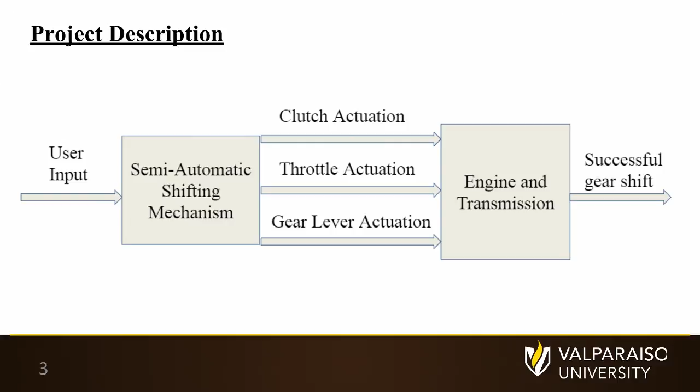As we've all seen this multiple times before in all of our presentations, for our device, a user inputs a signal through 2 buttons. That brings the signals to the semi-automatic shifting mechanism, and the mechanism consists of 3 parts: the clutch actuation, throttle actuation, and the gear lever actuation. These 3 parts interact with the engine and allow us to make a successful fast gear shift.

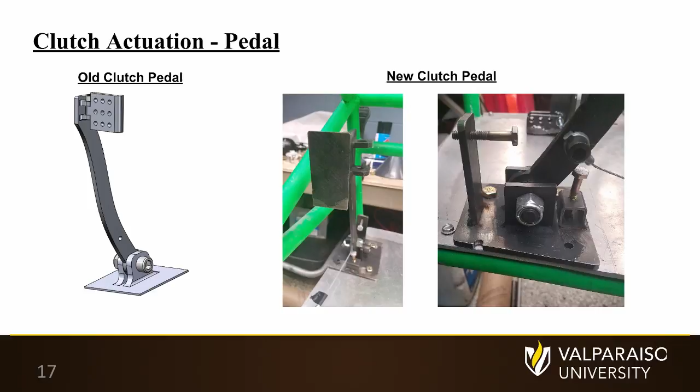Starting out with the clutch actuation, more specifically the pedal, you can see our old first design over on the left-hand side. We decided to change that for a few reasons. One, we found out that the spring out pedal was no longer needed since we have enough foot room already on the car. So we swapped it out for the center picture here, which is just a small rectangular plate still mounted on there, which suffices for enough area to push the pedal.

Also, you can see in this right picture that we added 2 stops to the pedal so the pedal doesn't go too far forward or too far backwards. This allows us to adjust the clutch in a way that whenever we're pushing, we are always moving the clutch cable.

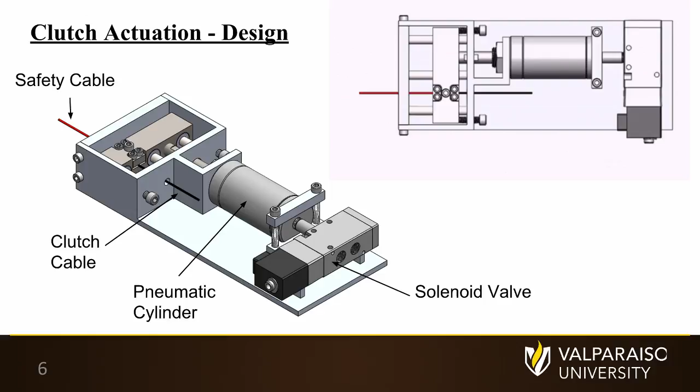So you can see from the animation up here, when air is sent to the cylinder, it pushes the piston here, which moves this piece outward, causing the clutch to be disengaged. When the air pressure is released to the atmosphere, the spring in the cylinder, as well as the spring in the clutch, allows it to return. So the fabrication of this actuator went fairly well. There weren't too many issues.

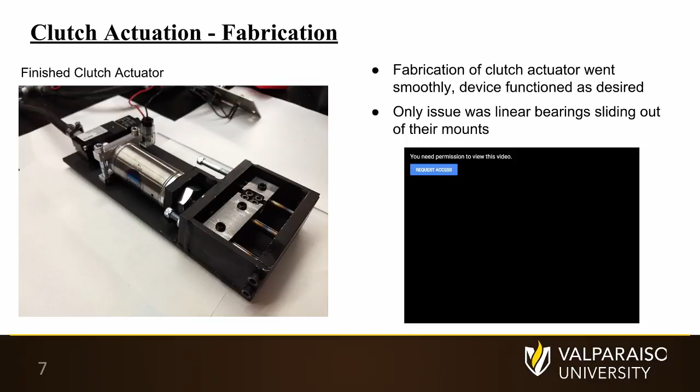The only issue that we had was that during operation, some of the linear bearings in here would come out of their mounts, but they didn't have enough room to actually fall out. So the one change that we would have to make is just use some high strength epoxy to keep those in, rather than just using these set screws as you can see on top of this piece here.

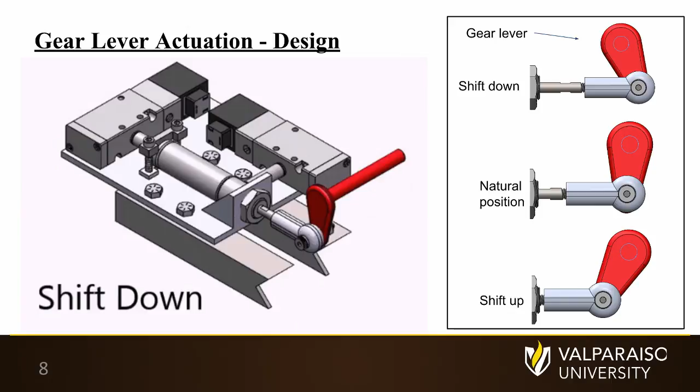For the gear lever actuator, we use a double acting cylinder, meaning that the air pressure can push it either forward or backwards. You can see on this graphic on the right of the screen, when no air pressure is sent to the cylinder, the gear lever, which is shown in red, causes it to rest in a natural position. When the rear solenoid valve opens, air pressure comes into the rear of the cylinder, pushing the piston forward, causing the transmission to shift down, as shown above here. When the forward solenoid valve opens, air pressure pushes on the front of the piston, pushing it back, causing the transmission to shift up.

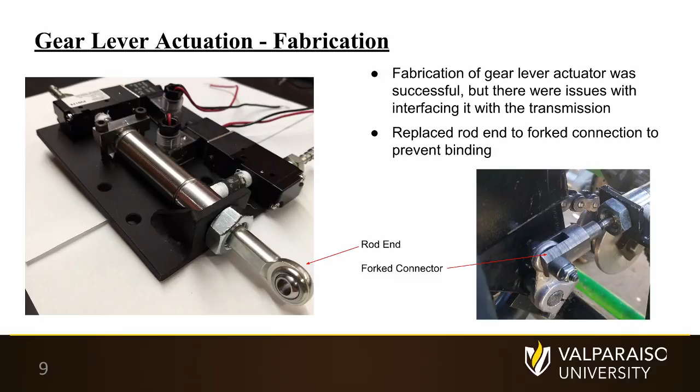The fabrication of the actuator went fairly well. There weren't any issues with it, but we did encounter some problems interfacing it with the transmission. So as you can see on the picture on the left of the screen, the original design, we had a rod end style connection, which would be offset to the gear lever, which is shown right here. We changed that up to a forked connection so that the piston in the cylinder would be in plane with the gear lever rather than offset to it to prevent any binding that would occur. We had some issues with it just not working smoothly, so having those in plane, there was no moment of the things trying to fight each other, and it worked a lot more smoothly.

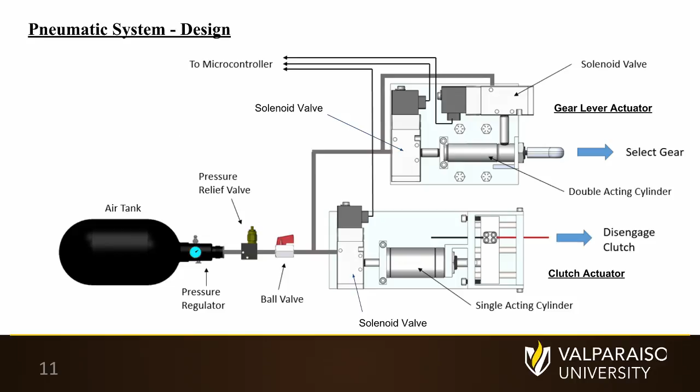So here's an overview of our entire pneumatic system. Starting over here on the left, we have our air tank, which, like we said before, holds air at about 3,000 psi. That then goes to a pressure regulator, which steps the pressure down to 100 psi, which is what our system needs in order to operate correctly. We then have a pressure relief valve, so that in case the pressure regulator fails, it doesn't send 3,000 pounds of pressure to the rest of the system, which would break everything.

We then have a ball valve, so if we need to do maintenance, take stuff apart, things like that, we can shut off the supply of air and not have to take everything else apart in order to take other components and do maintenance and whatever needs to be done. You can then see the air line splits off and goes to the clutch actuator here on the bottom, and then the gear lever actuator on the top.

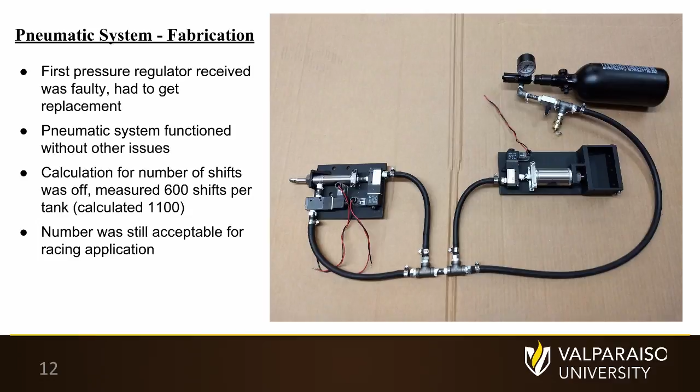So in fabricating our system, most things went pretty smoothly. Initially, we had a little hiccup where the pressure regulator that we received turned out to be faulty. So that set us back just a little bit, but once we got a replacement, building the rest of the pneumatic system went very well. We didn't have any issues with mounting or airline fittings. Basically, all that stuff went very smoothly, other than the gear lever actuator, which you heard before, which was just a misalignment issue.

The other problem that we had was what we had calculated for how many shifts we would get per one supply of the air. We had calculated we would get about 1,100 shifts. However, in our testing, we found that this was closer to 600 shifts. And this is due to some leaks in the system where air could escape. Also, the pneumatic cylinders probably used more air per cycle than we had calculated. So that's why that number dropped so significantly.

However, even with the drop in amount of shifts per tank, we still have plenty of shifts for the racing application that this vehicle will be used for. So in the end, it didn't end up being a problem.

The next system is the throttle actuation. So we have an electronic servo which activates the throttle. And this is so we can perform rev match downshifting. In order to get this to fit correctly, it took several iterations of building a bracket, mainly in order to get the pulley on the servo aligned in plane with the throttle, and also avoid other parts of the engine so that it wouldn't interfere with things like the valve cover or the fuel system and could operate smoothly.

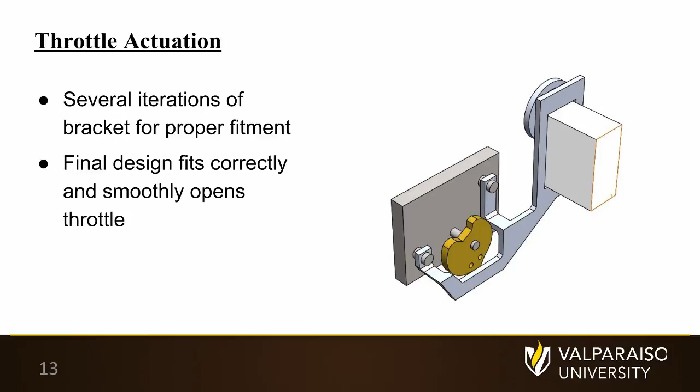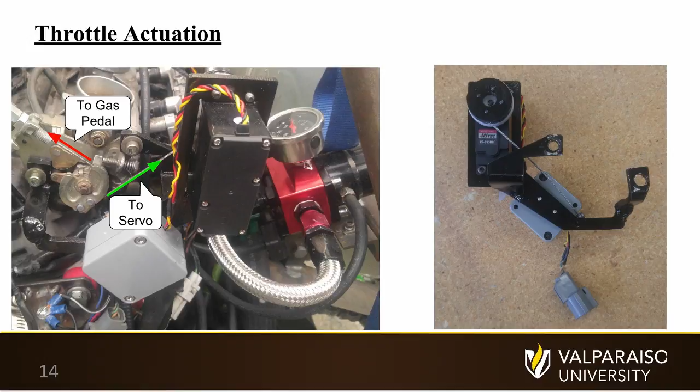And then on the right here is just kind of an overview picture of the servo itself in the bracket, and then the little gray box is a voltage regulator, which we had to add into the system since the car runs on 12 volts and the servo needed 6 volts, so we had to step down the voltage in order for it to work correctly.

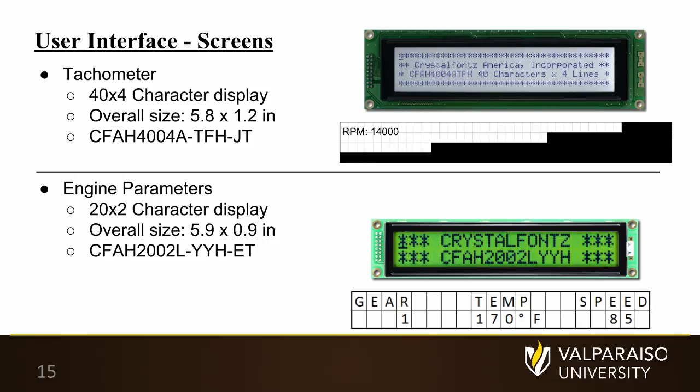So our user interface has two LCD screens, 4x40 on the top, and it has this visual tachometer and the RPM in the top left corner. And then our second LCD screen, which is on the bottom of our user interface, has gear number, temp, and speed all listed, and that is a 2x20 LCD screen.

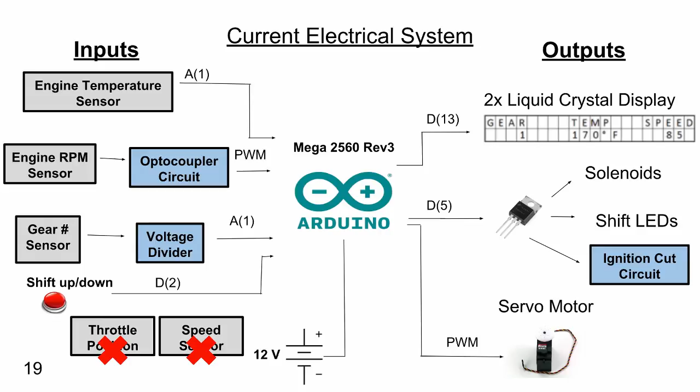So currently, we made some modifications this semester. So we ended up not needing the throttle position sensor. And then for vehicle speed, instead of reading in the PWM signal, we just calculated ground speed. We ended up calculating that from the gear ratio of the transmission. And then we conditioned some of these signals before we read them into the Mega so that the Mega can process them properly. And then we added in an extra digital output for the shift light and to cut the ignition.

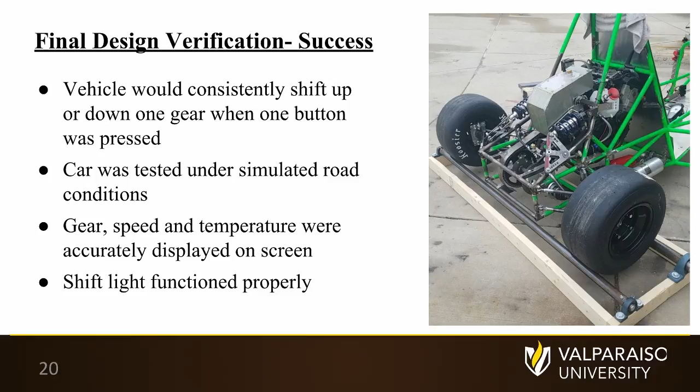Okay, so for some of the final design verifications, I'm going to be going over some of the successes that we had. The first one was that the vehicle would consistently upshift upon the press of a button and downshift upon the press of a button. Going further, it would only execute one upshift upon the press of the button once. Even if the button was held, it was needed to release from the button and then press it again. And additionally, we added in a half-second delay to make sure that the driver wouldn't accidentally double tap the shift button and change 2 gears really quickly.

The car was tested under a simulated road load. So basically what we did is we created a system of rollers that have a higher rolling moment of inertia, and that gives us a little bit more road-like conditions. The heavier steel tubes that are underneath the tires can kind of help keep the tires rolling when they start rolling, but also resist the initiation of rolling upon starting the car, which is good for engaging and disengaging the clutch to be the most road-like.

Additionally, the gear, speed, and temperature were accurately displayed on the screen. I'm going to be talking a little bit more about some of the challenges we had with this in a minute, but once the car was started up, it would display these properly.

And then finally, the shift light functioned properly. So basically the shift light was to inform the driver of the optimum time to shift in order to stay within peak power of the engine. This light is able to be changed at which RPM it actually comes on at, but we usually keep it about 500 RPM below the max RPM of the engine.

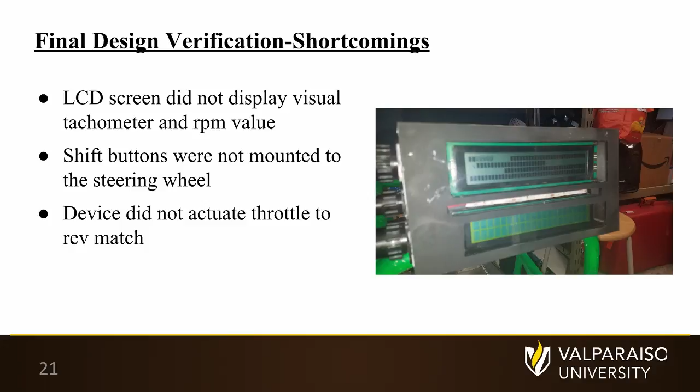So some of the shortcomings that we had with our project: the LCD screens didn't display the visual tachometer appropriately. When we used a tachometer function in the code, it worked well. However, reading in the tachometer reading, the engine RPM from the car, we were having some problems. Before executing a shift, it would work properly.

However, once a button was pressed to execute a shift the first time, it would have a lot of distortions. You can see the second line is shifted over, and then some of the characters would become messed up. And then for each consecutive time the button was pressed, we'd get a little bit more distortion.

And then the shift buttons were also not mounted to the steering wheel. That was another something that fell through the cracks that we just kind of weren't anticipating, kind of forgot about from our SDRD that it was something we were supposed to do. But luckily our system was still able to function appropriately.

And then one of the bigger challenges that we came into was that the rev match downshifting didn't work quite properly. Like the RPM display, we were able to control the servo from the code. However, when we integrated all of the different portions of the code together, we had a hard time getting the servo to actuate upon the press of a downshift.

So that's just something that we're going to be looking into for the future and seeing if there's maybe another easy way we can go about doing that. And that's something I'll talk about later as well.

So for testing, we had 2 really major components that we needed to meet. The first was that the system needed to be able to execute 100 shifts without missing a shift. Luckily, we got this on the first try, and we kept going from there and still didn't miss a shift. So that worked out really well.

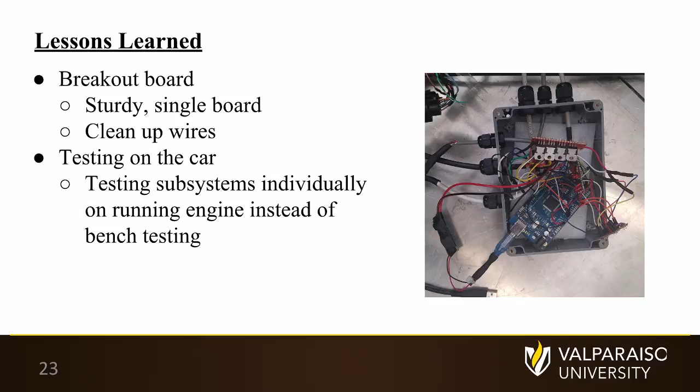And then not overcomplicating was a big one. I'm sure a lot of teams ran into things like this. Hunter mentioned before the clutch pedal. The spring-loaded clutch pedal was a great idea. However, it was just one more level of complexity that we didn't need. So removing that just gave us that much more room, that much less complexity in the front of the car.

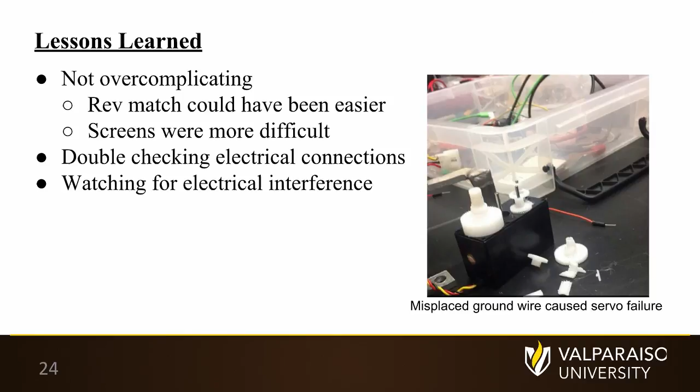And then the rev matching: upon discovering that our servo wasn't working appropriately, we determined that there might have been an easier way to rev match just from changing the engagement time of the clutch upon the downshift. And then double-checking electrical connections. You can see over here, just due to a misplaced ground wire, we exploded our first servo motor.

And that was just something that attention to detail and just double checking our work would have helped beforehand, but just double checking that. And then watching for electrical interference. We had some problems with our fuel pump when it was working, and then when the servo needed to draw power, we were having some interference. So looking into that beforehand might have helped us just implement some capacitors before we needed them.

So then for a summary, we went over our project description. We went over all of our subsystems that we worked on through the semester, our final design verification, and things that were met, and then some of the things that we struggled with. We went through the testing, and then the lessons learned. And I don't know if we're doing questions or not.

So you demonstrated last week that it's working fine, everything is working, but I have a question. If you want to redo your project, is there any subsystem you can approach in a completely different way? Like, completely redesign one of your subsystems for future generations? See the screen and the servo?

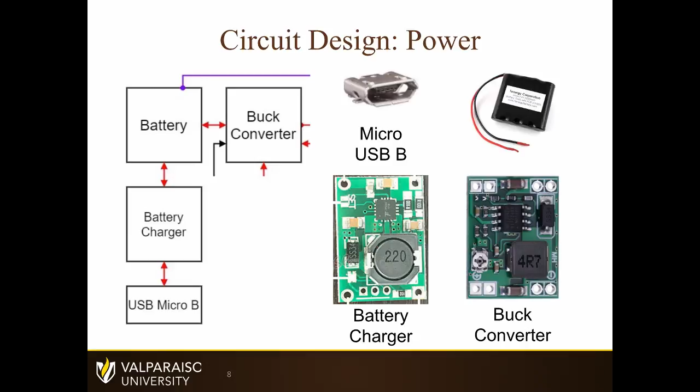In the original, we had a micro USB port, battery charger, and a buck converter. Micro USB was going to go through the battery charger, charge the battery, as well as power the circuit at the same time. However, there were some problems with this. First was this buck converter. The output was not always 5 volts. It had a tendency to change along with the battery voltage. And as a result, we lost 2 Raspberry Pis and 2 analog to digital converters.

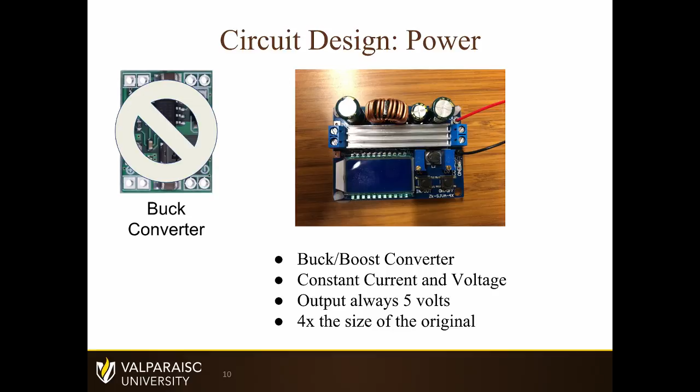So the solution was to get rid of it and get a buck boost converter. It is able to maintain a constant output voltage, which is always 5, which is ideal for the Raspberry Pi as well as the analog to digital converter. The only issue is it's about 4 times the size of the original converter. Also, the micro USB port was gone. We replaced it with a simpler power jack, mostly because it was challenging to fit the USB port into the housing. The power jack had enough depth that it was able to go through it.

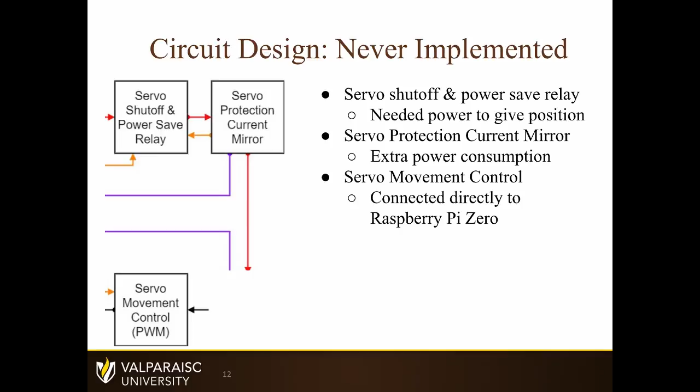And we also had some stuff that never ended up being implemented, such as this servo shutoff and power save relay. We had to wire an additional wire into the servo internal potentiometer to be able to achieve feedback, so knowing whether the door is locked or unlocked. And if it was powered down, we would never receive a signal over that. Also, the servo protection current mirror was never implemented either, as it just drew extra power. And then the servo movement control was an additional circuit to interface between the Raspberry Pi and the servo. And again, we ended up just connecting the servo directly to the Raspberry Pi.

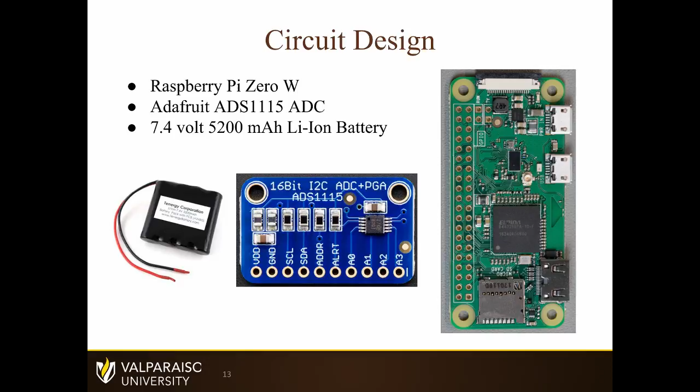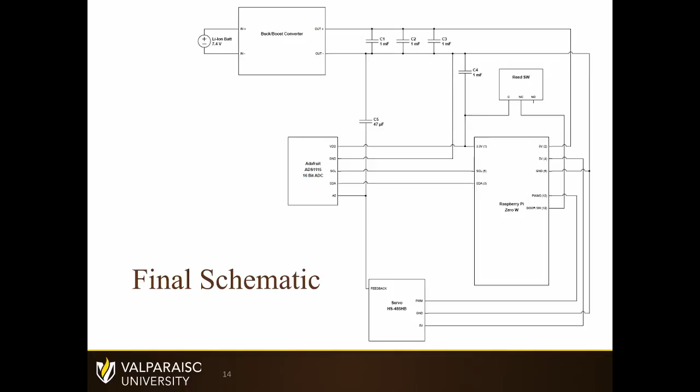The things that survived were the Raspberry Pi Zero W, which is the brain communicating with the database, as well as reading the ADC and the reed switch. The ADC read directly from the servo motor, and then a 7.4 volt battery. This is the final schematic that we ended up with. I understand it's kind of hard to read. There are some new components on here that I will show you.

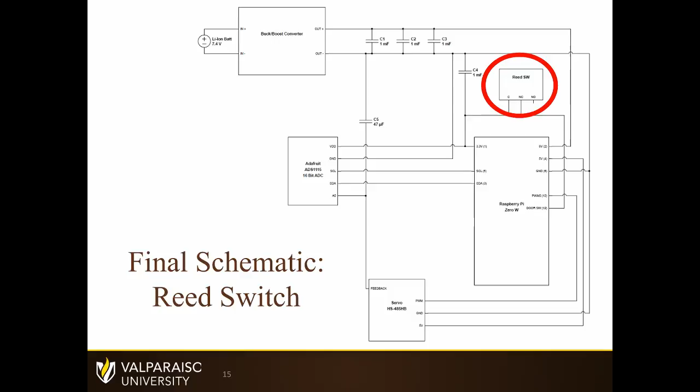The first was that reed switch. That component directly tells us whether the door is opened or closed, as well as not allowing the door to lock if it's changed to a locked state but the door is open. Also, the feature that kind of didn't work was warning the user of a break-in. That's also what that would have been used for.

Next are these 1 millifarad capacitors. When we first ran this on battery with the new buck boost converter, every time the servo tried to operate, it would actually cause the Raspberry Pi to restart. And after doing some investigation, we realized that it was overcurrenting the buck boost converter. So I started adding capacitors one by one until, when I operated the servo, the Raspberry Pi didn't restart.

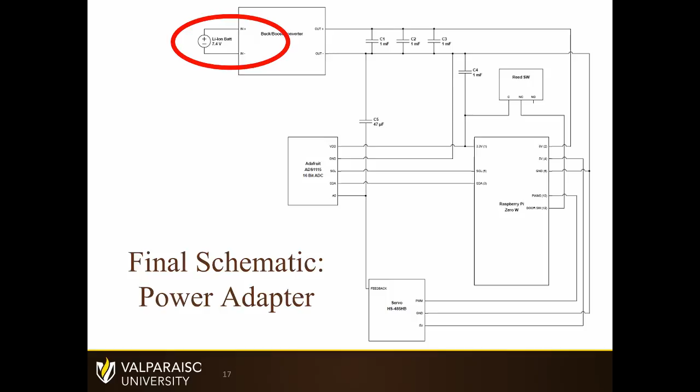And finally, the power adapter that was on the side plugged directly into the front of the buck boost converter, the input side. Our battery life from the original, which had about 92% efficiency, was probably about 10,617 unlock cycles. As you can probably guess, it never ended up being that.

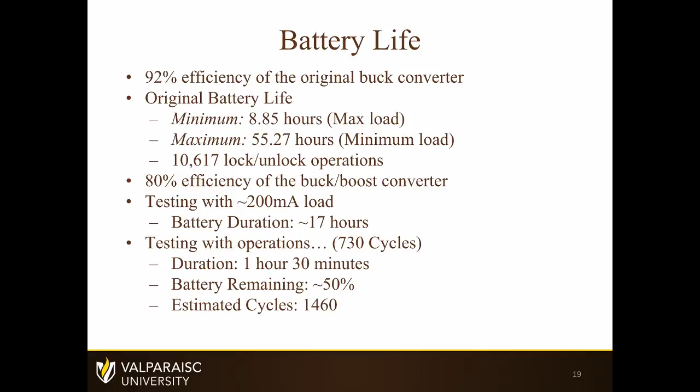The new buck boost converter had an efficiency of about 80%. I tested at about a 200 milliamp load, and the battery ran for 17 hours. That's with no operations of the lock. And then when we tested with operations for about an hour and a half, 730 cycles, about 50% of the battery was remaining. So the new estimated cycles would be about 1,460.

The mobile and web application can unlock and lock the deadbolt. It shows the position and indicates if the door is open or closed. The main problem with it is that the login screen was never implemented, so there's absolutely no security on your smart lock.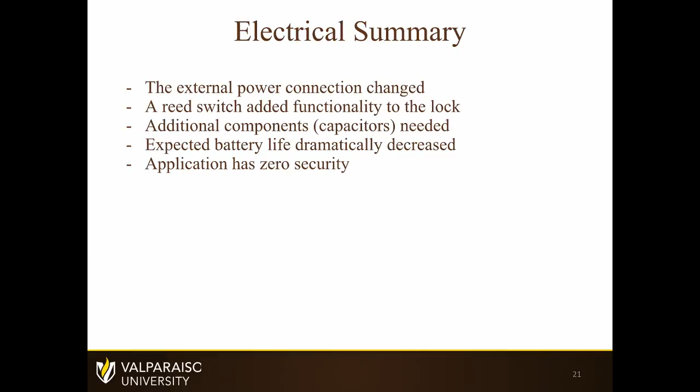So in summary, the external power connections were changed. The reed switch added functionality, letting you know if the door was open or closed. Additional components were needed. Expected battery life dramatically decreased, and the application has zero security. I'm going to pass it off.

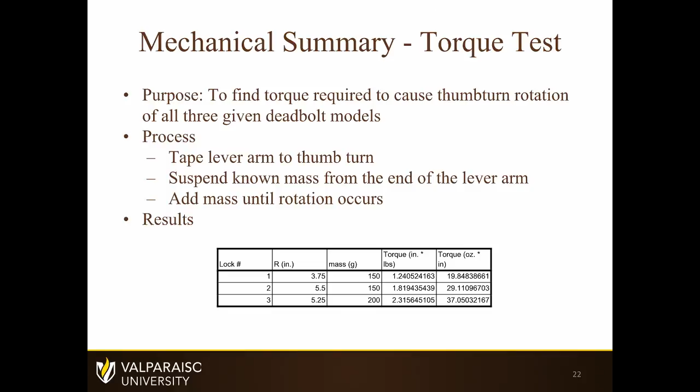So, preliminary for our mechanical systems, we wanted to determine how much torque was going to be necessary to turn the deadbolts, so we could order the right servo or have the right drivetrain for it. Basically what we did was we added a lever arm to the thumb turn, and then we progressively added more mass until it was able to actually turn the thumb turn.

And one of our deadbolts was particularly hard to turn, and the maximum for that one was 37 ounce-inches. So we knew that we could not have a servo that was going to be any less powerful than that. So what we ended up selecting was this HS-485HB servo. And what was nice about that was that it had 66 ounce-inches of torque at 4.8 volts. So that was going to be 1.8 times what we needed at most.

So it was going to be possible to operate at 5 volts, which was nice for the rest of our system. It was compact. It was only about 1.6 ounces, which is not very significant. And the potentiometer feedback was really important because then we knew if it was going to be locked or unlocked.

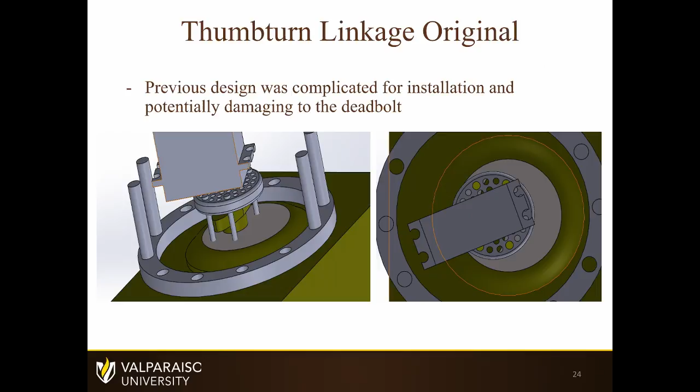So originally, to actually connect to our thumb turn, which is seen here, it was going to be a plate with a bunch of holes that were threaded so you could add pegs to each specific deadbolt. And so we thought that that would be really modular, but unfortunately that was not going to be very easy to install, because we wanted a system that was going to be very simple for the user to install, even if they're not mechanically inclined.

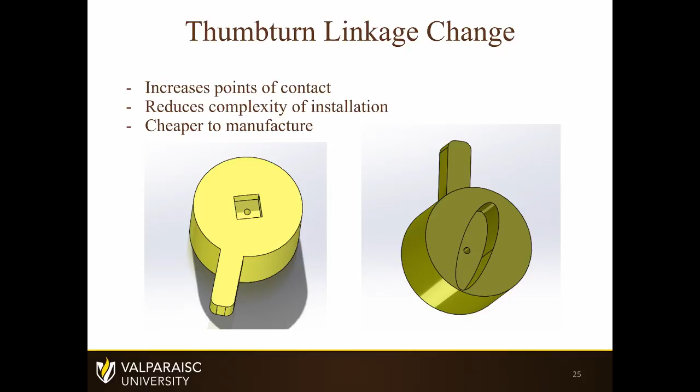So what we decided to do was have 3D printed linkages that would fit each specific deadbolt that was required by a customer. And originally we were going to have a small little peg to put in here so it wouldn't just be the spline from the servo, and it would increase the surface area on the 3D printed parts since it's a little more fragile. But instead of doing that, we decided to just use the actual servo horn that came with it.

And we did that because then we did not have to manufacture a spline into a square block of aluminum. And it was one way we knew that we weren't going to damage the spline by having a material that was going to be a little bit harder than the actual drive shaft of our servo that we purchased. And it was also going to be cheaper for us since it's free for us to 3D print these components.

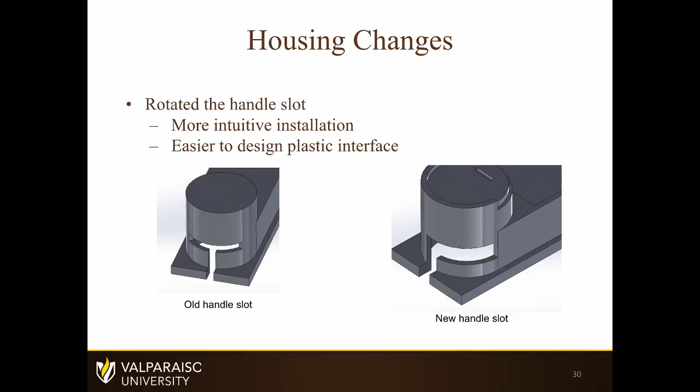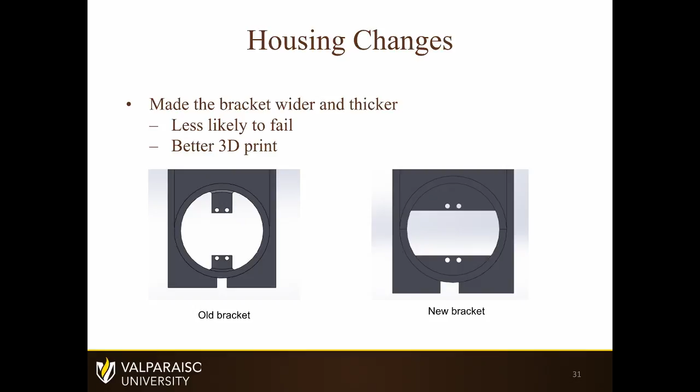And then here, this is where our servo actually connects to our housing. And instead of just having them be tabs, we just extended it longer so that we'd be able to have a little bit more security of a housing and not have to worry about these tabs breaking off under torque.

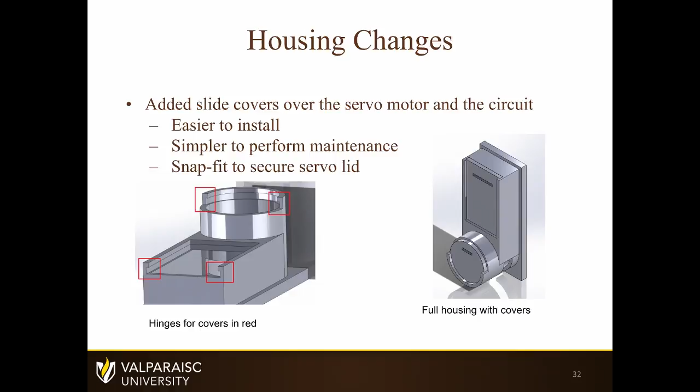And then we also added these covers to be more aesthetically pleasing for our electrical components and our servos, so they wouldn't be exposed and there wouldn't be anything that would be able to jam it. And we also added a snap fit to that after about our third revision so that we wouldn't have any jostling when the doors open or close.

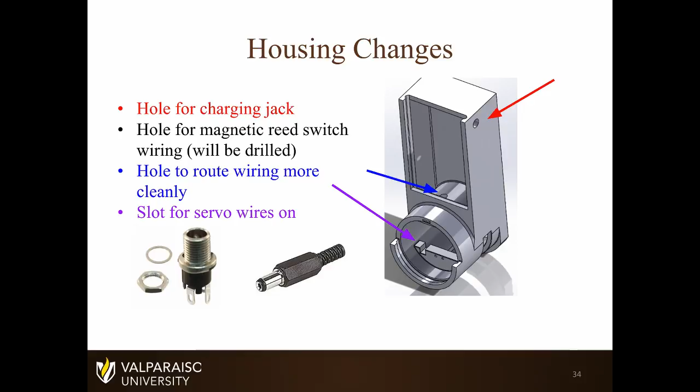And also for our third revision, we added our power jack because we had a little bit of change in plans for our power supply. We added a hole to route the wiring for the potentiometer and the servo. This was actually just for the installation of the servo. We didn't realize, because before we had to do some post operations on our housing in order to fit the servo through.

And then there's also a hole which is not visible right now for the magnetic reed switch, just the wires that go out to that. And this is basically just how the servo goes in. There's just 4 screws that go into the tab there. And then the linkage goes on top of the servo.

And finally, one of our final changes that we made to our mechanical systems was our change from our adhesive, which Mike will tell you a little bit about later. Originally, we used double-sided command strips, but we found that the tabs weren't accessible. Ordinarily how you take these off is that you pull the tab straight down and it stretches the adhesive out so it's no longer stuck to what it was originally stuck to.

But we could not get our housing off without prying it off, which you guys saw, that little dent that was in the doors because we used a screwdriver to take our housing off. So we switched to Velcro strips. So that means that we can take the housing off the wall and then the tabs would be visible, so it would be removable without any damage to the door whatsoever.

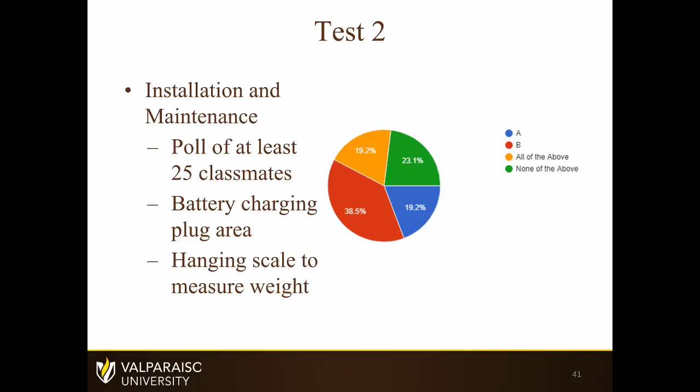So test 2, like Bill was saying with the adhesive, we had to change out our adhesive because before we were using just the regular stick-on 3M command strips, and that had a little bit of problem when we were trying to get those off the door. We've since moved over to the Velcro adhesive, and that is working out a lot better. Even during shooting of our video, we were still able to use a lot of the Velcro adhesive strips, and it has been working out great for us.

So with the second test, it was to poll the class. We revised the poll that you guys took, and we gave it to the later section. So this was what they received as well. They did, however, get the correct answer, but upon further investigation, asking them what they really would have preferred, if they had the option to choose that both looked the same, they would have chosen that. I had talked with almost all the people in the other section, and they just guessed, and it just happened to be a lot of them guessed the correct answer.

So another aspect of our test 2 was that there is a battery charging area. Bill showed you that we did adapt that there to be a plug for accessibility to the battery. So that passed, and then one of our SDRD requirements was that the system in its entirety was to weigh less than 3 pounds, and it came out to 1.75 pounds.

So test 3 was so that it did not make a lot of noise. Mainly the requirement was so that it did not wake up Professor Johnson's kids if he was actuating it at night. So we adapted the test to make sure that it was under 50 decibels from 20 feet away, which it was 9 decibels underneath it, so it definitely passed.

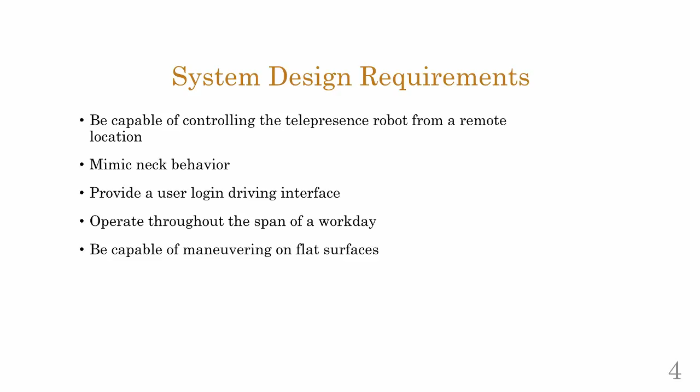So the goal of our telepresence robot was to give any user the ability to access our robot at a remote location and be able to drive it anywhere inside of Gellersen. Some of the system design requirements we came up with to meet this goal: we wanted to have control of the telepresence robot from a remote location, obviously. We wanted our camera gimbal to mimic neck behavior to give a more natural feel.

We wanted to provide a user with a login, driving interface. We wanted the battery to operate throughout the span of the workday, and for the entire robot to operate throughout the span of the workday. And we wanted the robot to be capable of maneuvering on all flat surfaces.

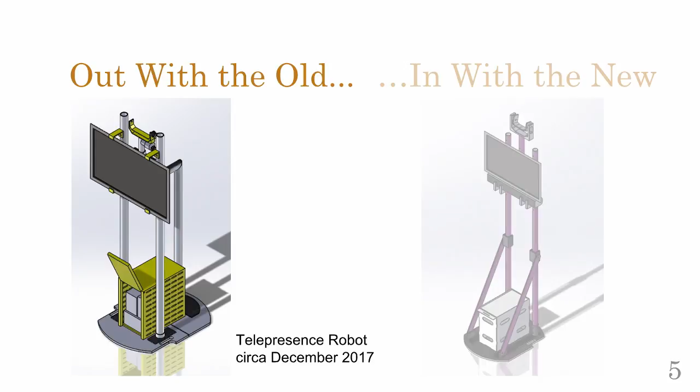So in December, this is the design that we came up with. And then at the end of our semester here, we approached this final design. And now Landon will go ahead and tell you more about what we did.

So, starting with kind of the meat and potatoes of our design: the stem structure, what is holding up our monitor and our soundbar. So in what we came up with at the end of last semester's design, as you can see, we have the 2 side stems with one middle stem to the back. As you can see, the monitor is only being held by these brackets here, and the side stems aren't actually connected to the center stem.

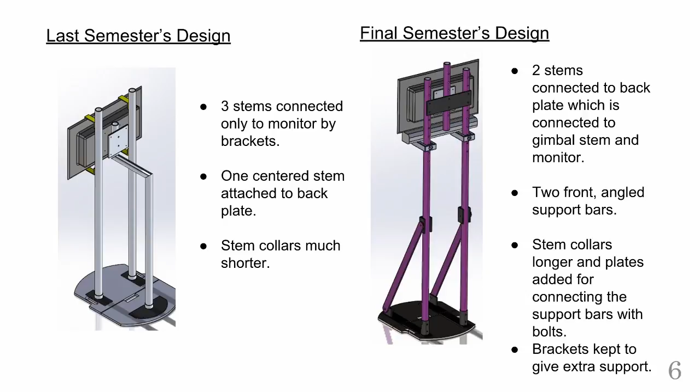So we decided to change not only this back stem design and make it into 2 front support stems, but we also, for our final design and what you can see on the robot now, have this back plate that also connects the side stems to the center monitor and the center stem.

We also got rid of the 2 top brackets. We realized they weren't important now that we had the horizontal bar giving extra side-to-side support, but we did keep the lower brackets to help reduce some of the wobbling motion from side to side when it turns and stuff, and to give it kind of a fail-safe.

So here's some of the intermediate changes. You guys have seen some of these before. So originally when we first went to this 2 angled front support design, we were just going to have this all welded. So in here, this was all going to be aluminum. And then we realized, well, none of us have ever welded aluminum before, and we figured this would not be the time to learn.

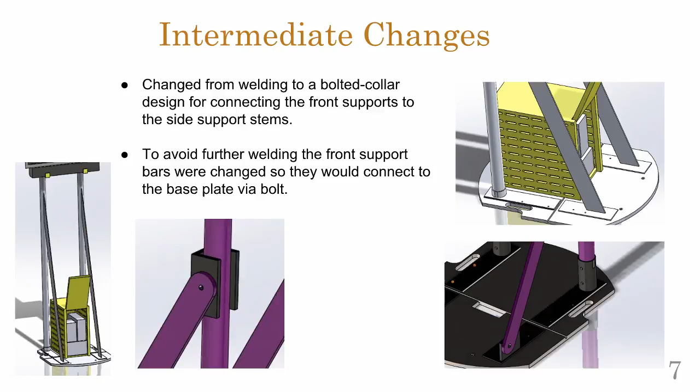And we figured that welding is going to make things pretty permanent. So we decided to come up with a design that's more manageable when it comes to taking apart and making changes. So at the bottom, we changed all the bottom plates to steel, the collars over here to steel as well, and made them longer so they can be bolted through. They're welded here, as you can see on the robot today.

We also created a front plate that is welded to this base plate, and all of this is bolted through. And then up here on the stems, instead of having it welded, we have this collar design. All of this was manufactured fairly well according to the pictures and the design.

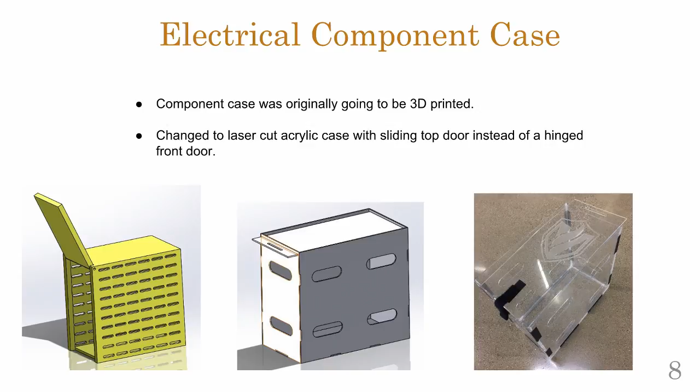So the next mechanical thing, one of the last things we tackled, was the electrical component case. This is the case that holds the battery, the PC, the converter, inverter, all the stuff we have. Originally we were going to 3D print it, but then we realized that we cannot physically 3D print it, I believe, with the size of it and what we're given in terms of 3D printers. So we decided to make this acrylic, laser cut, and then glue it together with adhesive.

And we also changed the front hinge door to a top sliding door, so it's more accessible from the top and easier to work on the components inside. And here's the finished product. And yep, I'll hand it over to Echo now.

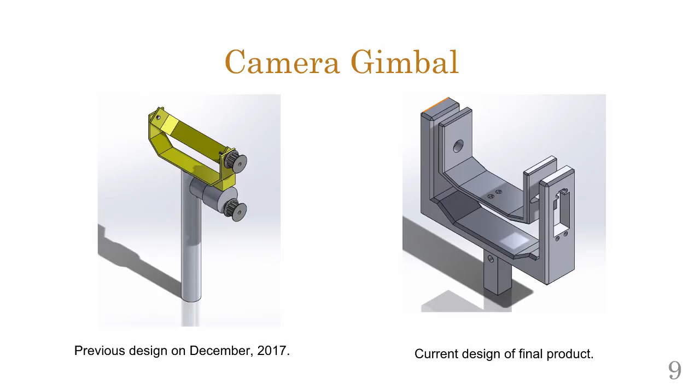So we also did some changes to the camera gimbal. So on the left is our old design of the camera. As you can see, the motor is directly mounted on the support tube here, and it will drive the gimbal by the gears and belt. On the right side is our current design. So the motor is mounted on the outside of the gimbal in this square here and connects directly to the inside by this cross shape. Later I will show a clear picture of it.

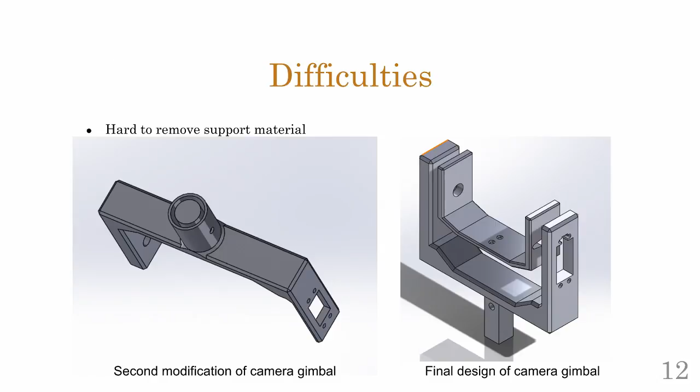Also, in the second modification, we came up with this support tube with 2 concentric circles, and we found out that it is impossible to remove the support material between them. So in the end, we just replaced it with this simple square here.

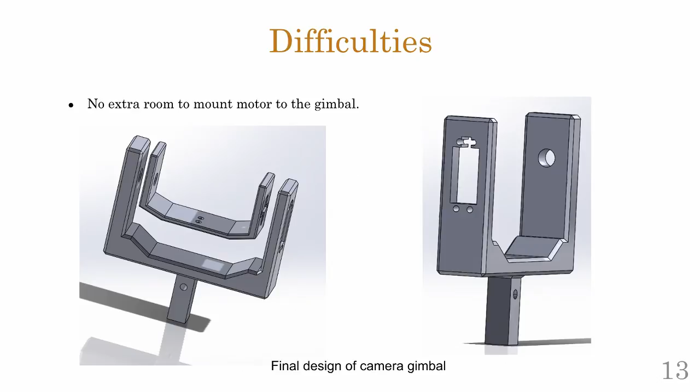Also, in the second modification, there's no extra room to mount the motor on the gimbal here. So we just made the left side of the gimbal thinner right here to leave extra space. And we also made this square shape here to allow the wires of the motor to come through here.

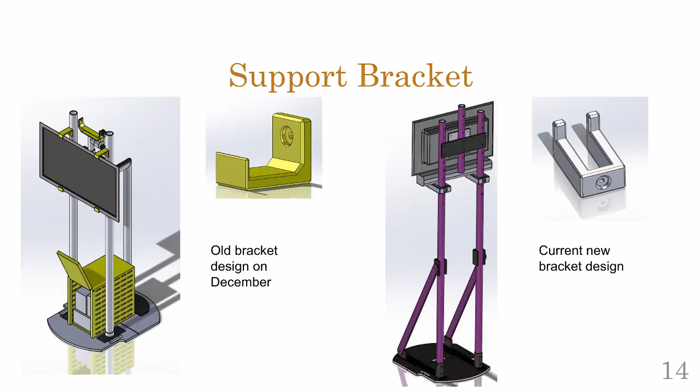So we also designed a new support bracket. In the old design on the left, we have 4 support brackets here mounted on the front side of the main structure. However, when we put on the monitor and soundbar, we found that there's no extra room between the soundbar and monitor here. So we designed this new bracket which is mounted on the back side of the main structure and attached to the soundbar to fix it.

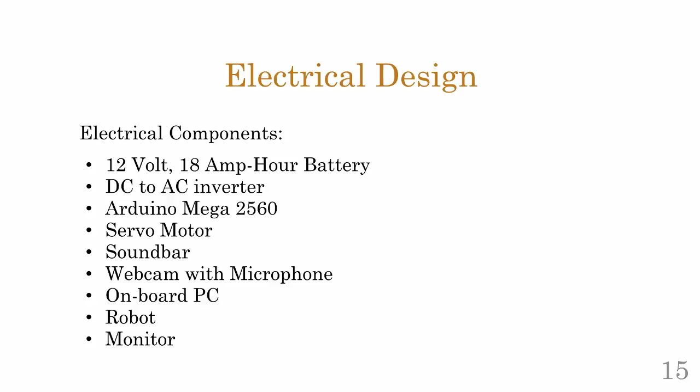So I'll be going over all the electrical components and electrical design today. The electrical ones that we had to use in order for our project to work were the 12-volt battery, the DC to AC inverter, the Arduino Mega 2560, the servo motor, the soundbar, the webcam, the onboard PC, obviously the robot, and the monitor.

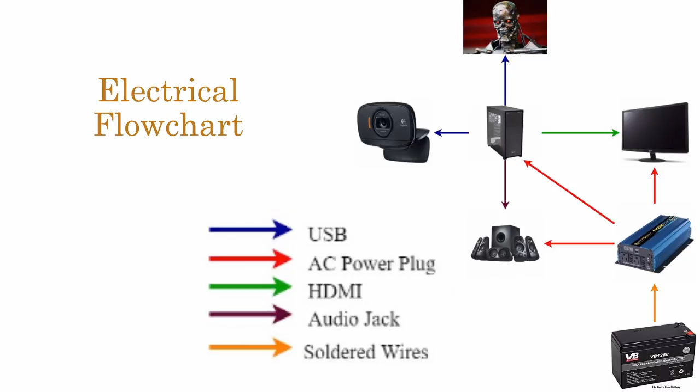So this is from last semester, and it's basically showing all the various connections that we had to make in order for our robot to work. Basically, the brain of the system is of course the computer. This will run the robot itself, and it'll also be able to control the camera gimbal, which, though just showing the camera right now, also includes the servo motor, the webcam, and the gimbal itself. It will send visual data to the monitor and audio data to the speakers, and everything is powered by the 12-volt battery, which goes into the inverter, and then everything else is plugged into that.

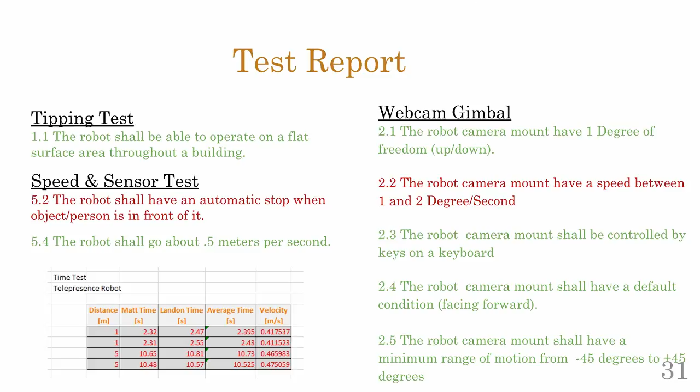So for the webcam gimbal, the robot camera mount had 1 degree of freedom, up and down. It did fail the requirement for the camera mount's speed between 1 and 2 degrees per second. And I do not recall what we used to measure that, but from there we passed every other SDRD for that.

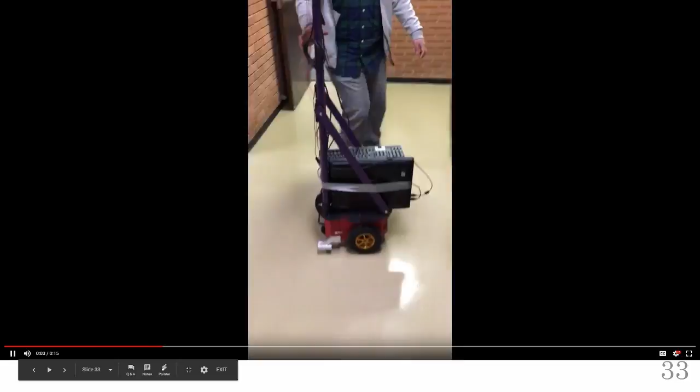So about right here, we lose connection, and then it just keeps driving into the wall. And there was no reason for it. We couldn't figure out why it kept losing connection there, but that was the only place in Gellerson that was losing connection.

So some quick additions. We put in the username and login page. We fixed the hard-coded IP address, and we actually made the sensors work. And then the new PC, since we were running it with my laptop, we'd rather run it with an actual new PC so that you don't need my laptop to run it.

Some new additions or modifications that the mechanicals would have done: we would have added new training wheels, the side support wheels, and the base of the robot to make sure the stability worked with our robot, not just with previous iterations. Holes for wires to run through on the stem supports, cleaning up the appearance a little bit. We would have used a different type of component case, probably with a little bit more money we could have gotten extra quality, but we were a little strapped for budget at the end and chose a cheaper route. And then finally, if we go back one slide, we would have added horizontal movement for the camera gimbal to mimic even more neck behavior.

Finally, in summary of our presentation, we took you through the goal of our telepresence robot. We went through our SDRD requirements. We went through the mechanical, electrical, and computer components. We did a test overview. We talked about some additions that we've made, and now we have time for questions.

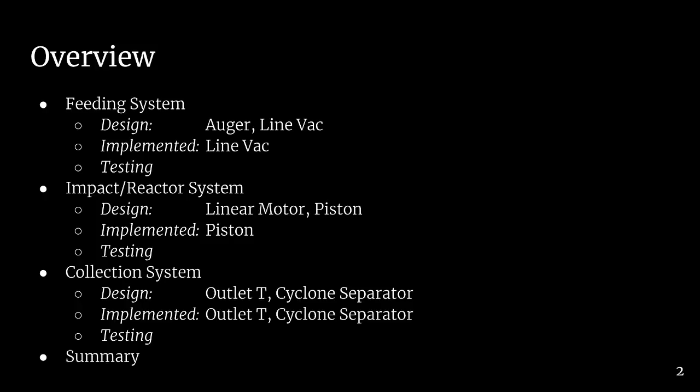To kick things off, I'd like to start with an overview of the presentation you're going to hear. We're going to start with the feeding system and talk about the auger and line vac and its implications. Then we're going to talk about testing of the feed system. We will then go into the impact and reactor system, where we talk about the linear motor design and the design of the piston, why we chose the piston, and how we tested it. Finally, we will go into the collection system and talk about the outlet tee and the collection cyclone separator, the testing for that, and we will end the presentation today with a summary.

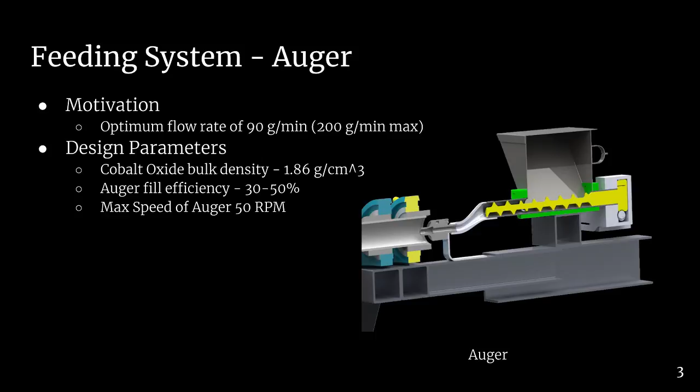One of our main goals for our project was to increase the flow rate of cobalt oxide through the reactor up to 90 grams per minute or greater. When the project was handed off to us at the beginning of last semester, our customer raised concerns that one of the limiting factors for achieving this goal would be the existing auger feed system. This system, in the solar furnace, utilized a 3D printed auger to dispense cobalt oxide. By the end of their research over the summer, it had not been tested over 30 grams per minute, out of fear of either breaking the auger or because the existing reactor would not be able to handle any higher flow rates. So they didn't really have a need to feed higher, and feared they would break it.

To address this issue, in addition to addressing some of the other issues with the reactor, our team decided we would simulate and then test this auger just to make sure it would actually meet the demand we were going to be putting on it. So our first step was to make a model of the auger, just so we didn't end up testing it and breaking it.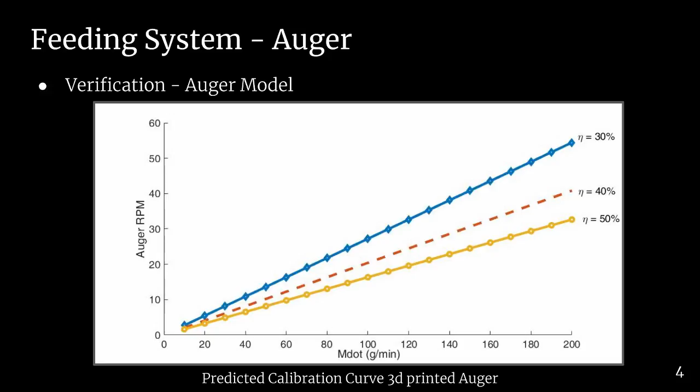And based on these curves, we were able to determine that theoretically the auger should be able to feed up to the 200 grams per minute within our desired RPM range shown on the left. So since we had that result, we decided to proceed forward with actually testing the auger. And the testing from that is shown here on the screen.

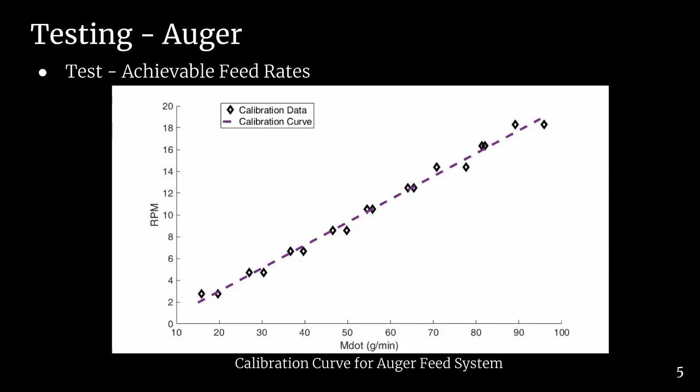So from this calibration curve, you can see that we tested up to 100 grams per minute and generated a calibration curve for that. The reason we stopped at 100 grams per minute was that if we went any higher, the auger would start making new sounds and things like that, and we feared that we were going to break it. And along with that, when we were testing our auger and our whole entire system, we were also limited by the fact that some of our modifications were not capable of feeding up to that 200 grams per minute.

However, if we overlay the model of the auger and the calibration curve for the 40% fill efficiency, you can see here on the screen that they actually line up very, very well. One thing to note though is that the model of the auger did not account for any additional feeding due to the vibration motor that's attached to the back of the hopper on the auger feed system.

So in conclusion, we were able to determine that the effective auger fill efficiency is about 40% for our auger, and it'll basically meet our applications and required essentially no changes at all.

So the second area that we needed to address in terms of feeding cobalt oxide into the reactor was that the existing system was unable to handle that high flow rate through the inlet shaft of the reactor. To address this, we chose to utilize a line vacuum to accelerate the cobalt oxide using compressed air into the reactor cavity. This had a few benefits besides just moving cobalt oxide in faster, in that it also generated a better cloud of cobalt oxide inside the reactor.

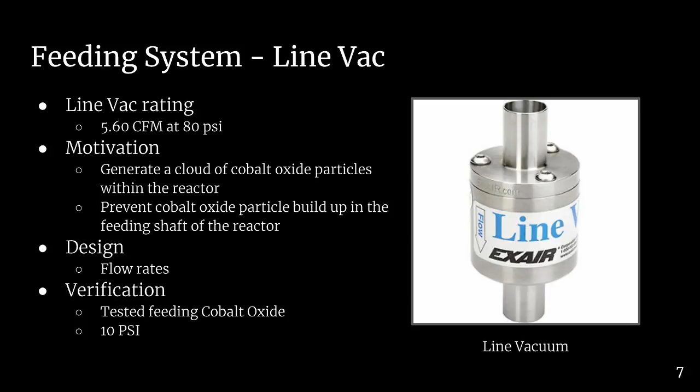So in terms of the overall goal of the reactor, which is to perform the chemical reaction, it basically directly irradiated cobalt oxide with sunlight. After all the testing and verification, we determined that when we run the line vacuum at 10 psi, it basically meets our objectives.

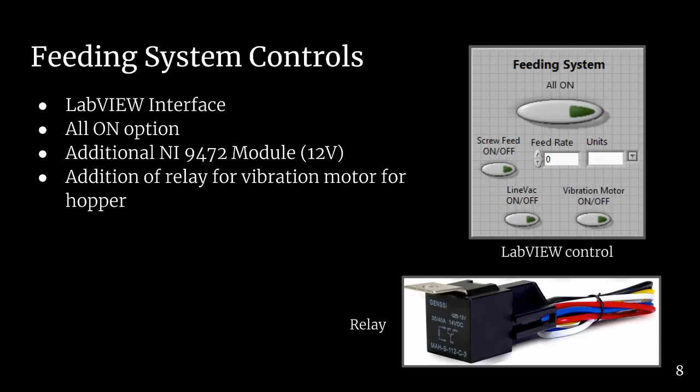So the user controls the feeding system remotely through LabVIEW. There are 3 components of the feeding system: the screw feed, the line vac, and the vibration motor for the hopper. To make this more convenient, we implemented an all-on button, which turns them all on at once, so you don't have to press every single button every time you run the experiment, which saves a lot of time on delay as well. But there was also the choice of running each component by itself.

The vibration motor for the hopper required 12 volts. Initially we had a 24-volt module switch in the compactRIO, but we needed to add an additional 12-volt module to control the hopper itself and any additional 12-volt applications in the future. We did find out that the vibration motor requires more current than the module gives it, so we had to order a relay, which is shown right here. This allowed the additional current to be delivered to the hopper.

Thank you. So the addition of the line vac that Ryan Taylor talked about allowed us to easily reach the 90 grams per minute cobalt oxide feed rate that we were intending to hit. However, we were aware from the beginning of this process that adding forced induction of cobalt oxide introduced a risk of blowing cobalt out of the aperture of the reactor, a question that actually several of you asked during our OPRs.

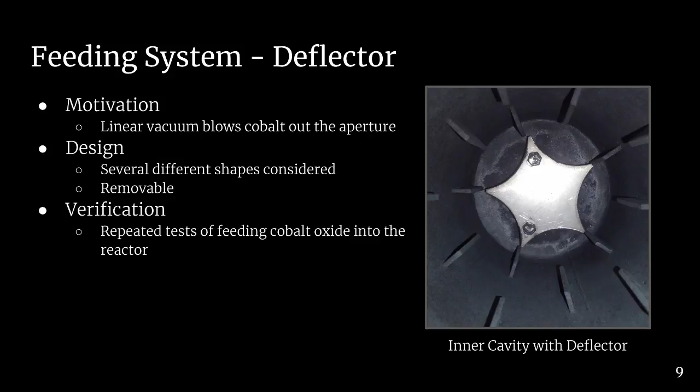During preliminary testing of the line vac, we realized that this fear was in fact founded, and we measured some cobalt oxide coming out of the aperture. So consequently we created several designs for deflectors like the one shown here to solve this problem. They redirect the airborne mixture of particles to the sides of the reactor and keep it from coming out of the aperture. A side benefit of this is that redirecting the particles causes them to reside longer in the reactor, increasing the chance that they fully convert from one form of cobalt oxide into the form that we're looking for.

Several different designs were made for this, including two-dimensional circular and star-shaped deflectors, as well as a three-dimensional bowl-shaped deflector. The three-dimensional one was thrown out because of implementation concerns in terms of how we were going to mount it. And between the two-dimensional deflectors, the star-shaped one proved to be a lot more effective. So the way we've chosen to implement it with the two-bolt strategy means that if in the future the SURF decides to change the pressure at which we're operating the line vac, say if we do need to feed up to 200 grams per minute, you can easily remove this deflector from the front without having to take the cavity out, manufacture a new one, and bolt it in from the front, making future work easier to complete.

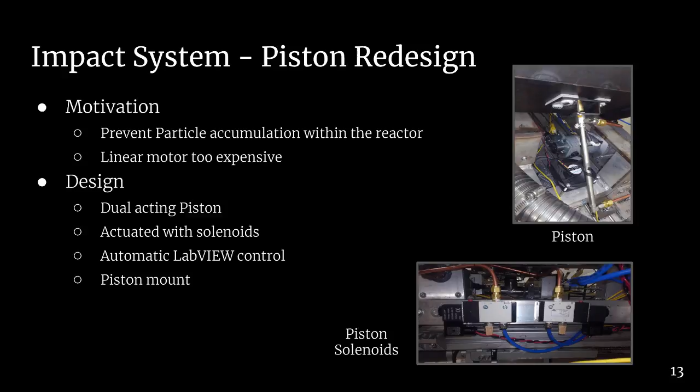So now that we knew the linear motor wasn't an option, we needed to design something new for the impact system. We ended up going with a pneumatic piston. There was already an air compressor in the SURF; it wasn't in use, but it had already been hooked up to the test stand. We selected a dual acting piston, which allowed us to actuate the extension and retraction of it. The piston is actuated through two single acting solenoid valves, which we are controlling through LabVIEW. We also designed the mount of the piston to help us with heat transfer, since that was one of our big concerns with the piston.

Like I said, the maximum operating temperature of the piston is only 200 degrees Fahrenheit, which is about 93 degrees Celsius, so this was a big concern for us, as the inner cavity of the reactor operates at temperatures at or above 1,000 degrees Celsius. So to help mitigate the heat transfer through the reactor to the piston, we installed quarter-inch insulation between the outer shell and the mount, and between the bolts and the mount, as shown in this picture here.

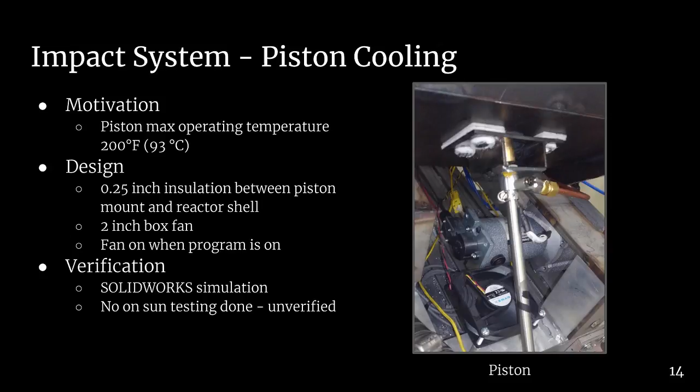We also are using a box fan for forced convection over the piston to help cool it. So to make sure these ideas were going to be sufficient enough, we simulated it in SolidWorks heat transfer simulation, which predicts a maximum temperature on the piston of 46 degrees Celsius. This temperature has not been verified with an on-sun test yet, but the weather is looking a lot nicer now, so we're hoping to test this soon.

So here's the control path for the piston. As mentioned earlier, all the controls are done remotely in LabVIEW, which is on a computer outside of the room of the test stand. From LabVIEW, it connects to a compactRIO, which is the industrial controller. The industrial controller has several modules. One of these modules is the NI 9472. This one in particular is a 24-volt digital I/O module. So this acts as a switch for us, which connects to the solenoid valves, which then control the position and velocity of the piston itself.

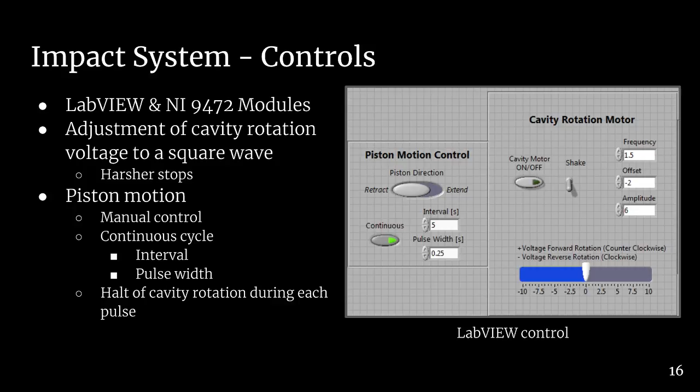The second one was the piston motion, that's on the left. There were two options for control, a manual control, so you can extend and retract at will, but for the experiment we needed more of a continuous cycle. So here we implemented a continuous mode. You have the option of selecting the interval as well as the pulse width when it's extended. An additional factor was to reduce damage to the rotating cavity itself as well as the piston. We wanted to halt the rotating cavity when the piston was extended, so that was implemented as well.

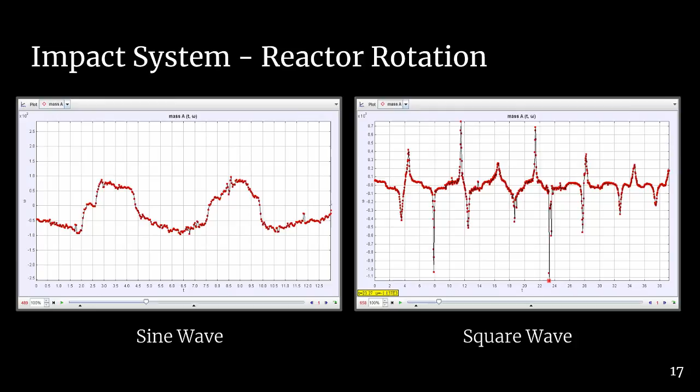So the reactor rotation, initially what last year's group had done was implement a sine wave. These are two graphs. The y is the angular velocity and t is time. Basically what's happening here is in the sine wave, it's going forward, slowing down, coming back. This is fine and all. It does mix up the powder a little bit in the reactor chute, but we really wanted to get kind of a jolt. And if you see here on the square wave, how it's very harsh, this creates a jolt in the reactor rotation itself, which actually knocks the cobalt oxide off of the walls. It's not a huge difference, but it was enough that we made the change.

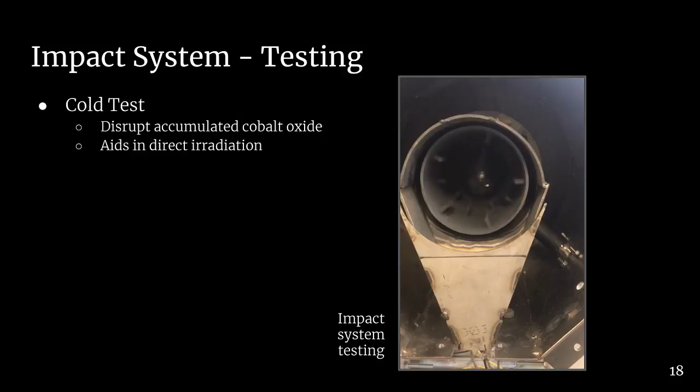So this is our video of an off-sun test of our impact system all working together. As you can see, the cavity is rotating, stopping, piston striking, there's cobalt oxide falling off the walls, and then the rotation is beginning again. We haven't tested this on sun, but from our off-sun testing, this shows to be a very promising system that will either reduce or eliminate the buildup of cobalt oxide inside the cavity.

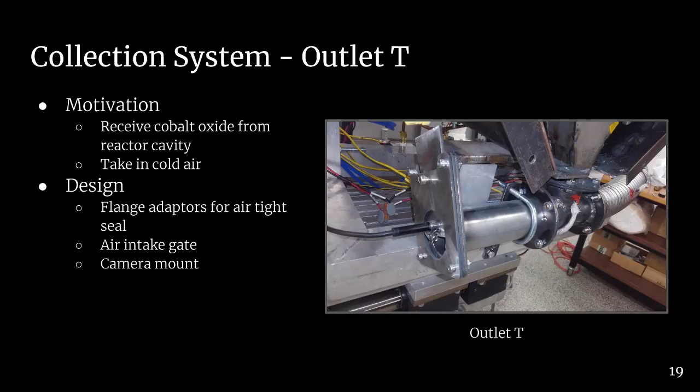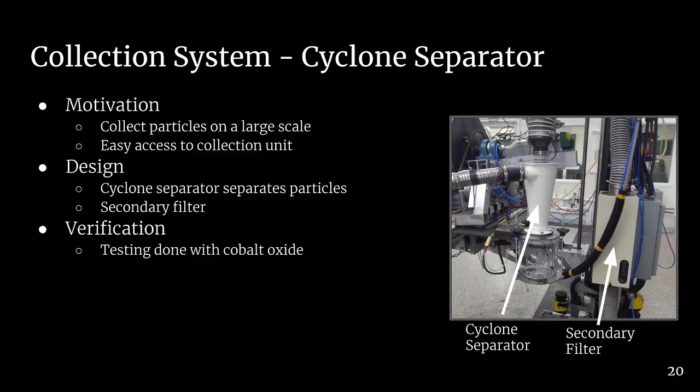One of the most critical pieces of the collection system is the cyclone separator, which is necessary to continuously remove cobalt oxide from the airstream flowing through our reactor system. It operates using the same principle as a centrifuge, and the way we've placed it allows easy access to the cobalt oxide through the collection vessel shown in the bottom of the photo following the conclusion of an experiment. Downstream of the cyclone separator, we've included an inline filter for safety reasons. Although the cyclone separator has extremely high efficiency in separating out the cobalt oxide, we wanted to include this just to make sure that any cobalt oxide that's not removed from the airstream is caught in the filter rather than